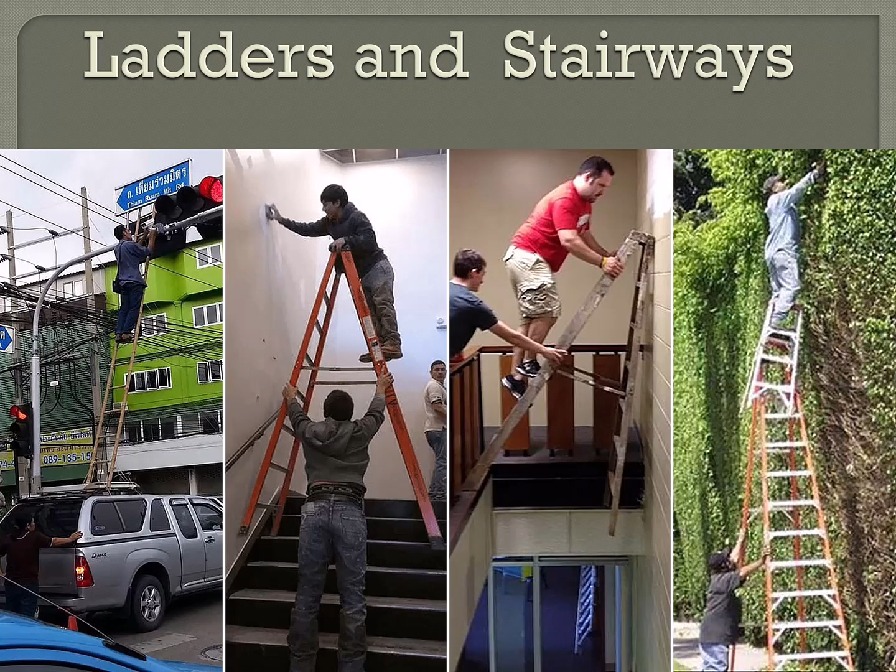Okay, today we're dealing with ladders and stairways, and hopefully none of them like this. One of the worst combinations is when you have to work over top of a stairway in some way, and then you start using a ladder. So a couple of these in the middle are dealing with that aspect. But none of these pictures are good. Okay, so don't do what these guys are doing.

So first of all, I stole this graphic, and it's not spelled right. Laddars should be ladders, but it does illustrate that we have different angles. A ramp has to be a much gentler slope, and then stairways are somewhere in the middle area. Actually, for OSHA, you can go up to a 50-degree slope with stairs when you're talking about the stair stringer, and I'll show you an example of that later. But for the building codes, you have to be somewhere in that area of 30 to 35-degree angle.

And then for actual ladders, they're supposed to be somewhere around 75 and a half degrees. But they can be vertical if they are what we call fixed ladders that are mounted to the side of the building, mounted to the side of a tank or something. And then there's these danger-prone areas in between where a stairway doesn't work very well, and a ladder certainly doesn't work very well either, for between 50 and 65 degrees for any setting.

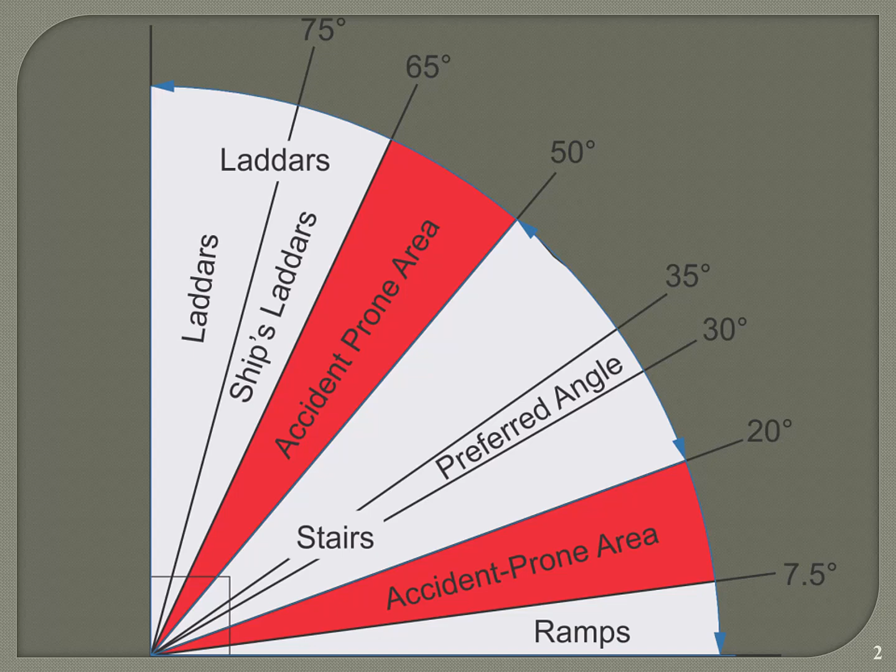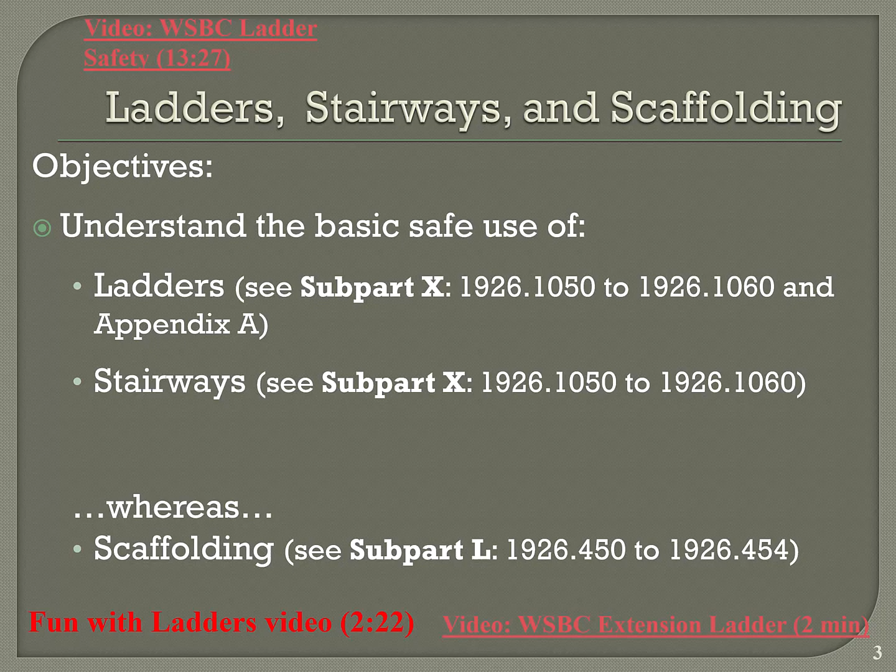So first of all, ladders, stairways, and scaffolding are all part of how we work at elevation. Here we're focusing on ladders and stairways. They fall under subpart X in the construction standard between 1926-1050 through 1926-1060, and they have an appendix A in there also. Meanwhile, within that same section is also stairways in that same area there. So they're subdivided and they're dealt with together. Whereas scaffolding, which will be our next topic, is in a different section of the construction standards, subpart L, 1926-450 through 454.

This all comes from the top four ways that we have fatalities in the construction business. Falls, working from elevation, and so that's the top one. And so dealing with ladders, stairways, and scaffolding kind of relates to that area. Meanwhile, of course, struck-bys and caught-in-betweens we've covered already, and they deal with 10% and 3 or 4% respectively. And then, of course, in between those two is electrocution, which we're going to get to soon.

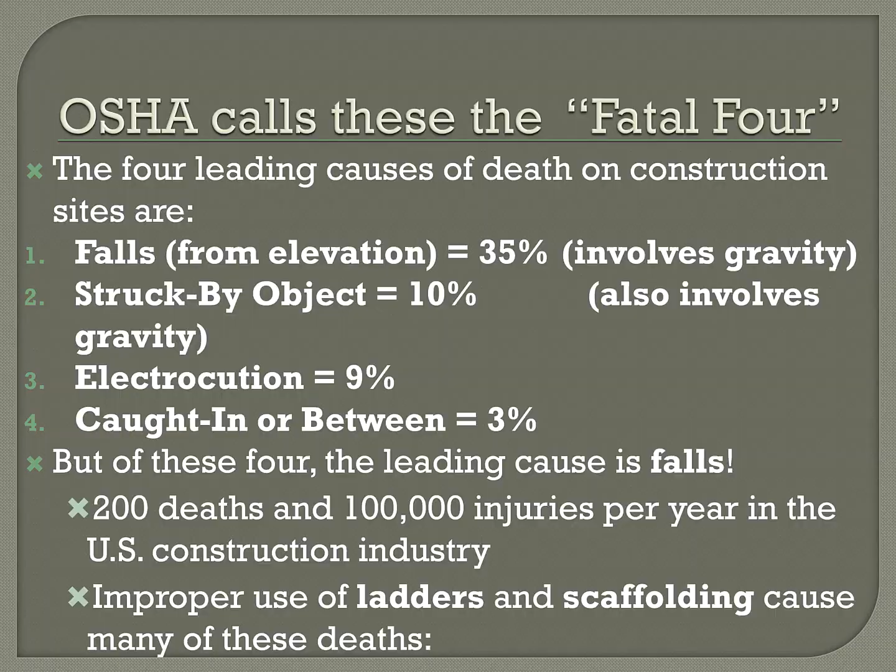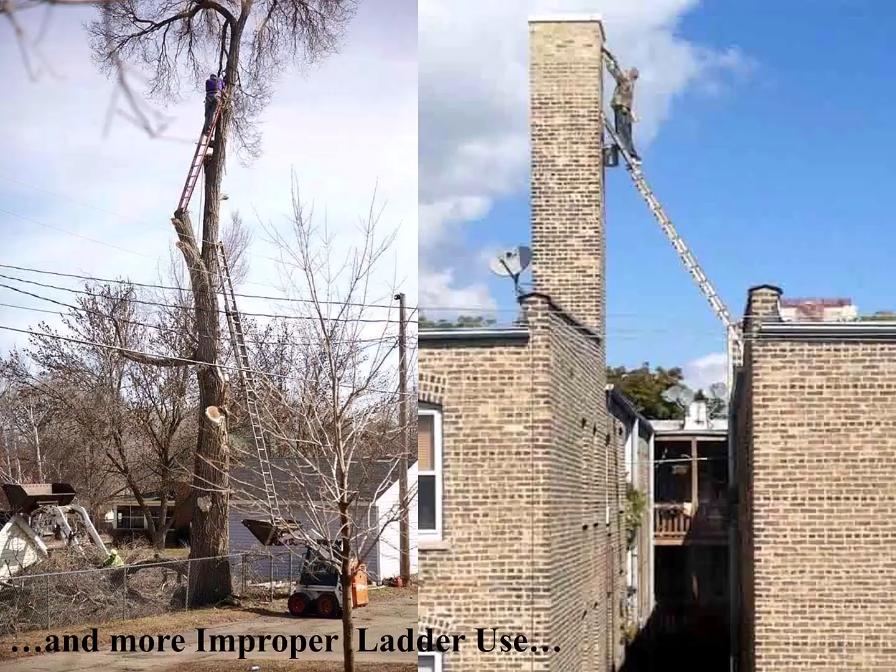He literally propped a ladder inside the bucket of a little loader, a front-end loader, a little toy loader. And then he cut a perch in the tree to sit another ladder to get up a little higher. So, you know, when you've got a can-do attitude, it's amazing what they will accomplish. But this is risking life and limb to try to cut a tree down. It's not worth it, and it's certainly something OSHA would freak out about.

Okay, and then we've got this fella here. He's standing on the 'do not stand' sticker on the second rung from the top of the ladder. When we consider the hinge point, that black part on the ladder, to be the top rung, you're never supposed to stand on the top two rungs of a step ladder.

The most common accidents associated with ladders, stairways, and even scaffolding are falls, being struck by falling objects, and electrocution, because if you're using aluminum ladders, they conduct electricity. Fiberglass is, of course, immensely safer for you.

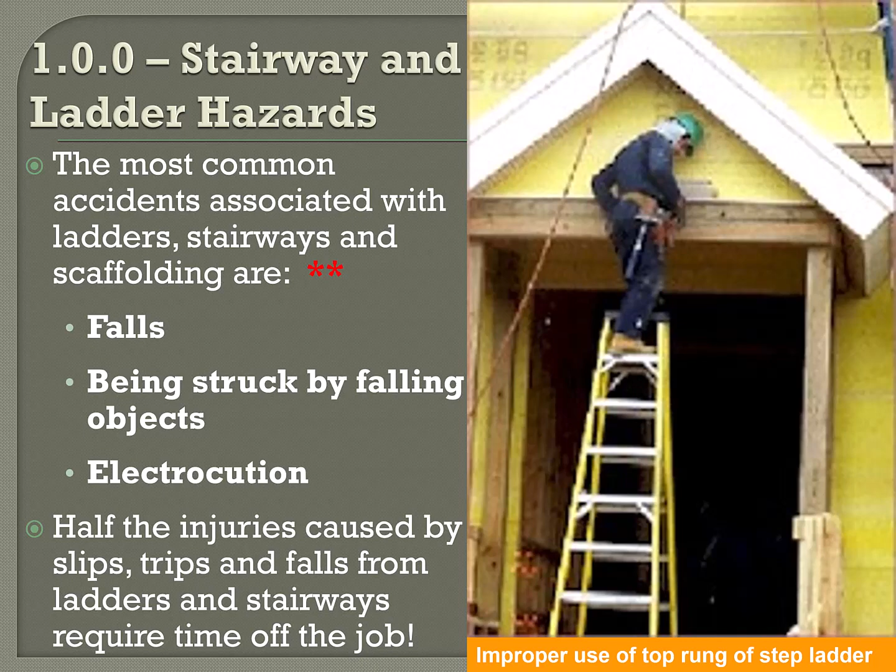A wooden ladder could be safe from electrocution if it's dry, but sometimes you can't tell that condition, because the surface of a ladder could be dry, but it could have been left out in the rain and gotten soaked, and still conduct well even though the surface seems dry. So it's hard sometimes to determine whether your ladder truly is dry enough to not conduct electricity, unless you know where it's been and its history. Heck, in Louisiana, wood in its natural state, not wet, just from the humidity, is going to have more moisture, and that means it's going to conduct more than that same wood in a very dry climate.

Okay, so what's wrong with this picture? Well, it's another aluminum ladder next to power lines. It's also maybe steeper than a 4-to-1 ratio, so it's a little steeper than it should be. And notice the guardrail on that set of stairs is pretty Mickey Mouse, so it doesn't really give you the room for this. Oh, and then you'd probably have to climb that guardrail just to get on the ladder too. It should be made of fiberglass or maybe wood. So it's an unsafe condition for several reasons.

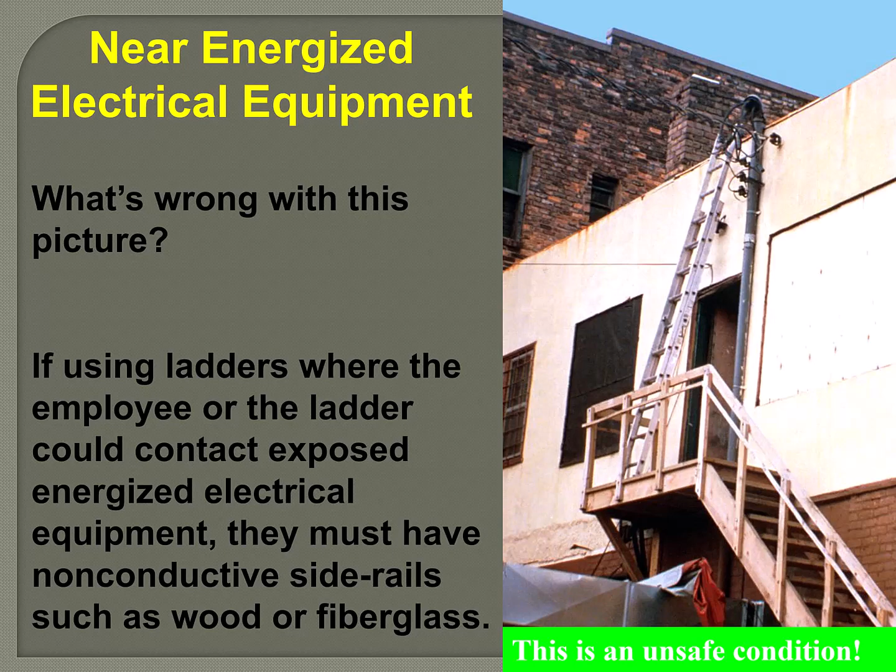And so that's the total run, or the run. Now we can talk about the unit rise and the unit run.

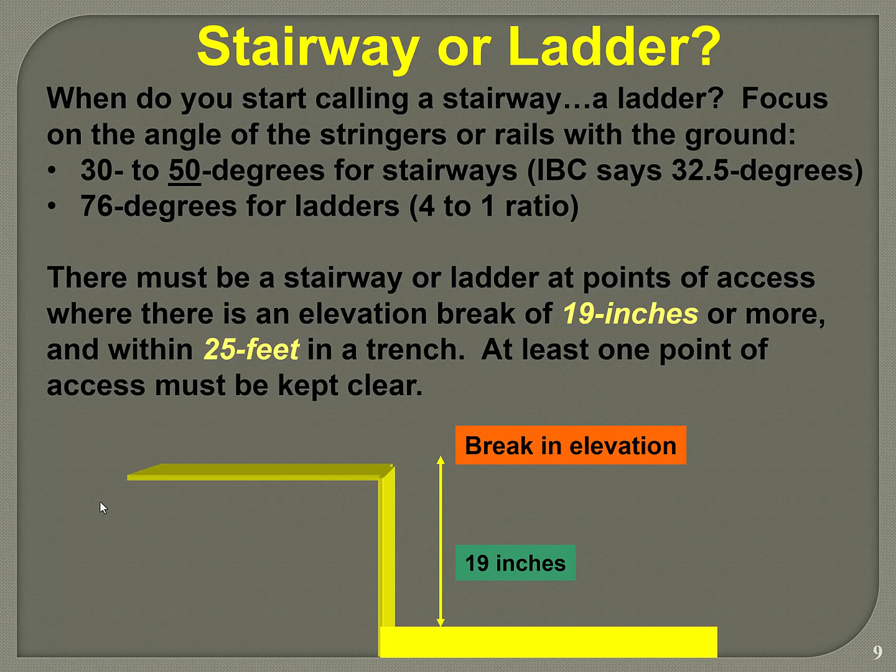And then if you're in a trench, you always have to have an egress, which is usually a ladder, within 25 feet of you. So that means you could have ladders every 50 feet in a trench, and you'd always be within 25 feet of a ladder. Okay, so that's enough things for this page.

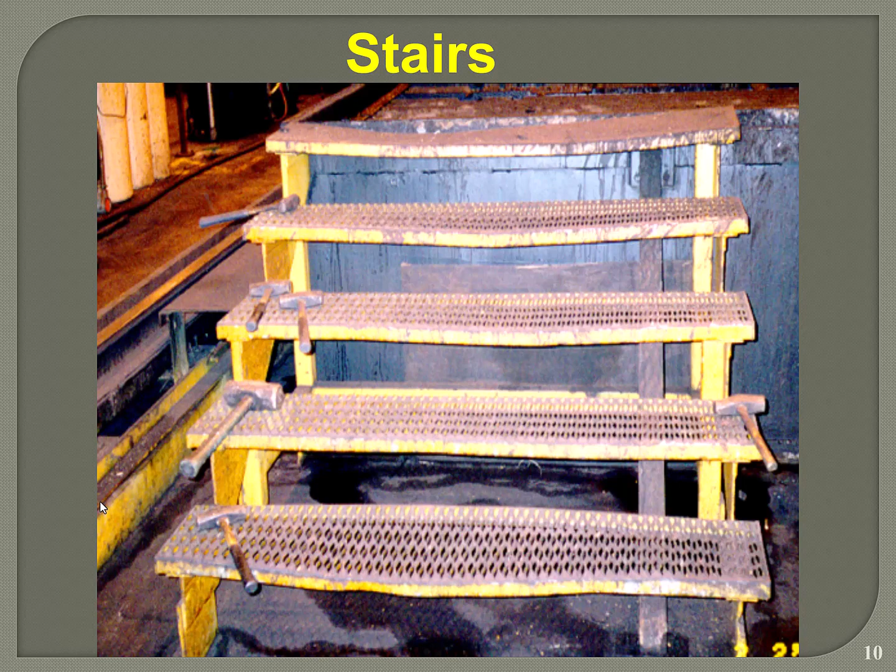Now, one other thing about this picture: as you decide you're having steeper stairs, in residential construction you can get away with, let's say, a 7 3/4 inch rise. As you increase the riser height, that will tend to make the tread boards slope downward forward. So as you increase one, you have to decrease the other. If we're going to have a riser height of 7 3/4 inches, that makes it a steeper stair, and to keep the stairs level on a stringer like this, you have to decrease the treadboard width. So if you had an 11 inch tread, you'd have to have a 10 1/4 inch tread board. There's another way of calculating it that could be slightly different, but when you're only making small adjustments like that, you can do one for one—as you increase one, you proportionally decrease the other.

So what does that do? That keeps the stairs level, and that's important because it's a little funky climbing stairs that are sloped forward or backward. But as you do that, now you've got less stair to stand on. So instead of having 11 inches to put your foot on, you only have 10 1/4. It goes the other way too—if you decide to have 4-inch risers, which is the minimum allowed by the building codes, you're going to have very wide tread boards.

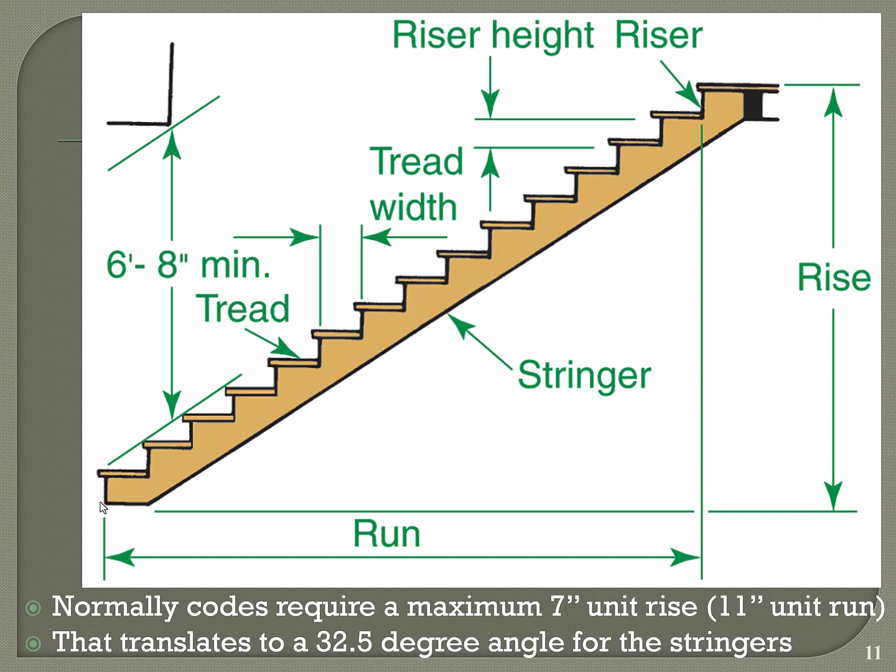I'm talking about some fundamental things that are pretty obvious once you start thinking about it. The other thing about stairs is you have to have something to hang on to. If you're climbing stairs where you've got a kind of guardrail type system, we call that a stair rail system. Whereas if it's mounted to the wall, we call it a handrail. I'm not going to be tricking you or worrying about that difference too much, but there is a difference and you should know that. Not everybody in the industry uses that terminology properly, so it doesn't mean you correct your boss when he or she mentions it incorrectly, but there is a difference in the definition here.

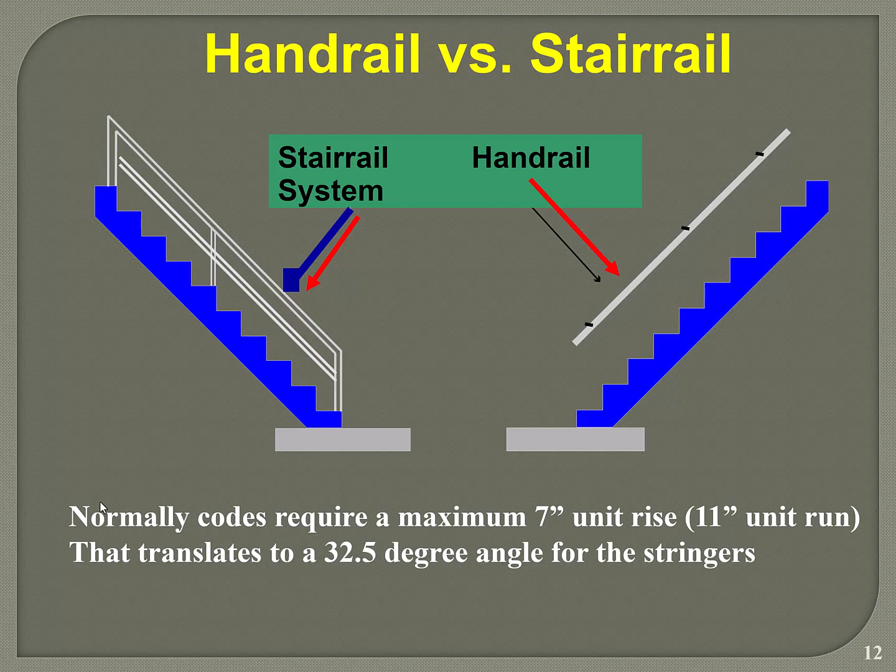They should be able to withstand the same force a guardrail system normally has to support: a horizontal force of 200 pounds pushing or pulling at the top rail, which should be the same on top of a stair rail or handrail system.

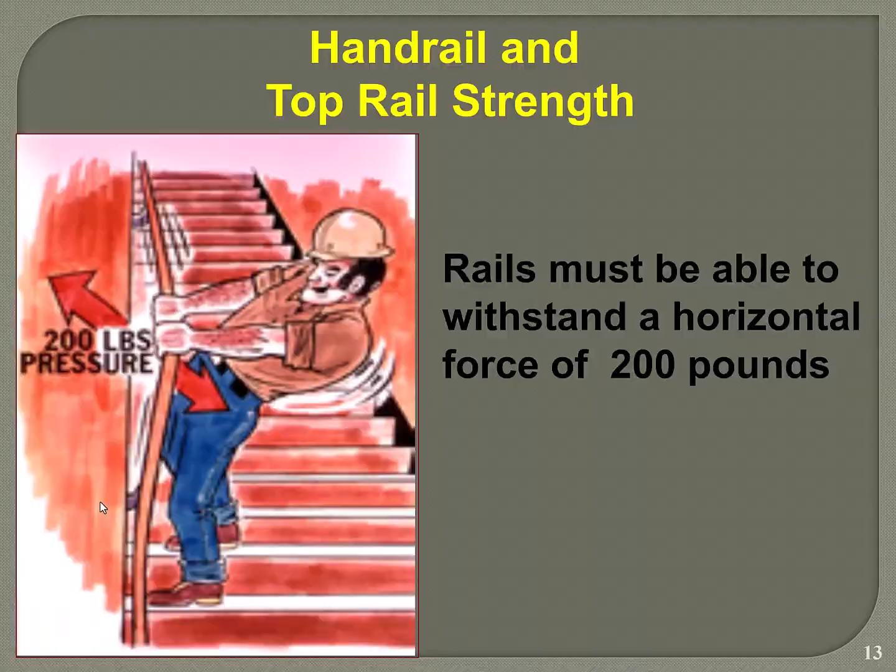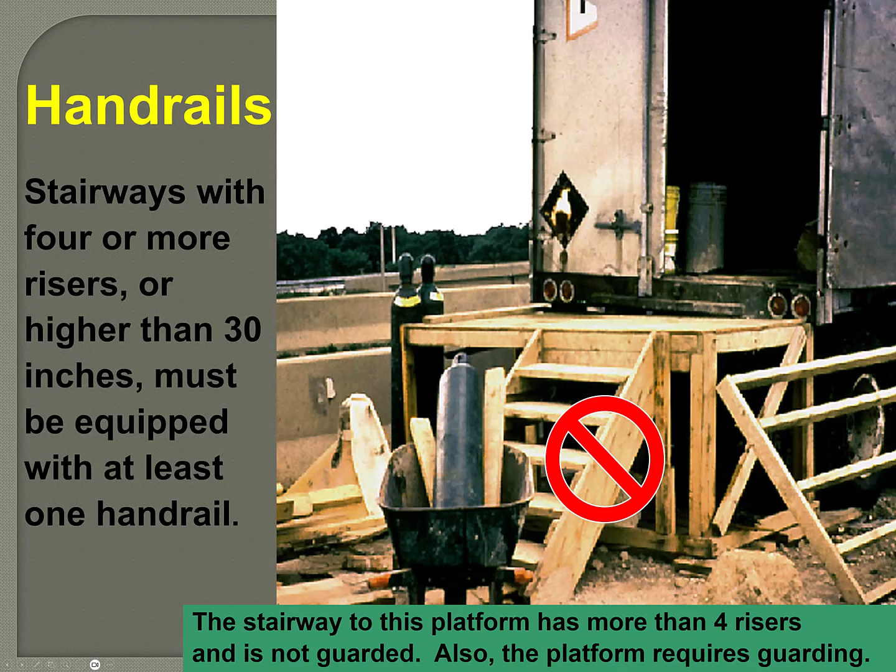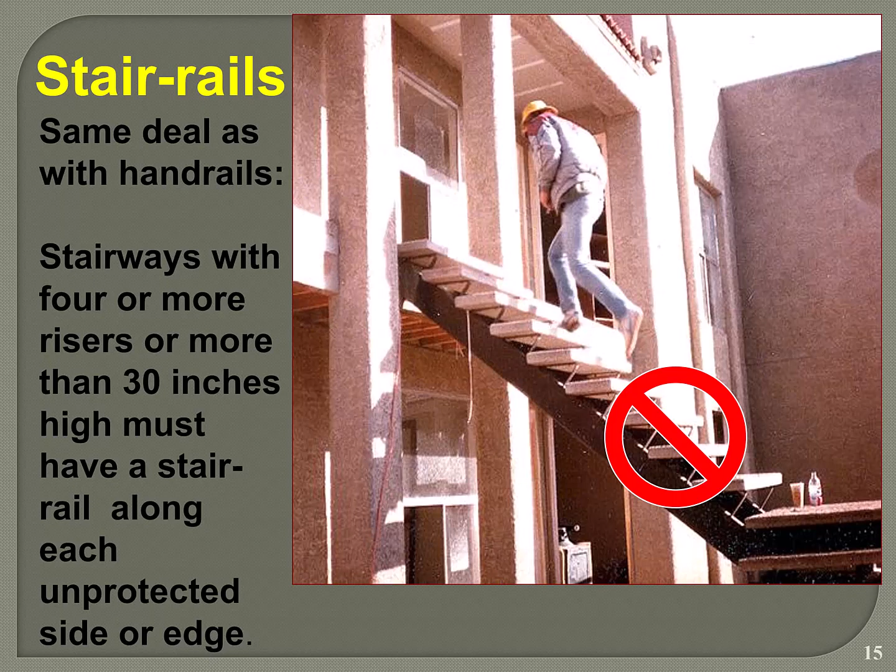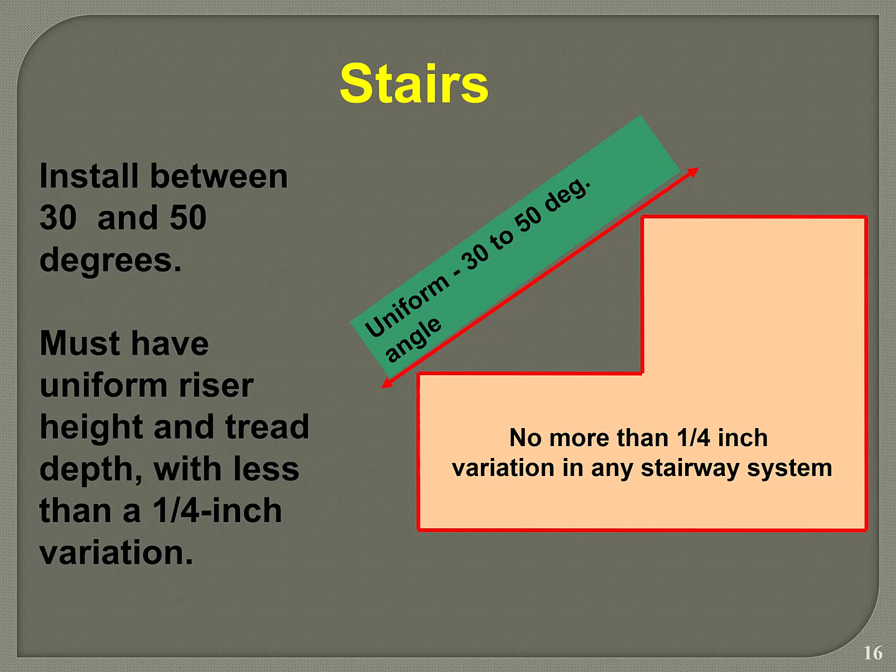Let's move on. Here we're looking at a wider set of stairs, and they're climbing higher. But just because the stairs are wider doesn't mean you're allowed to get away without having a railing, a handrail, or some kind of stair rail to hang on to. Stairs have to be uniform, like I said. OSHA allows you to go from 30 to 50 degree angles, whereas building codes only allow you to be somewhere around 30 to 32 degrees, maybe 35 degrees in residential. But it's not a good idea. If I was building my house right now, I would not ever go with anything steeper than 32 degrees.

No more than a quarter inch variation in any stairway system. That said, a quarter inch is not best practice. An eighth of an inch is more like it.

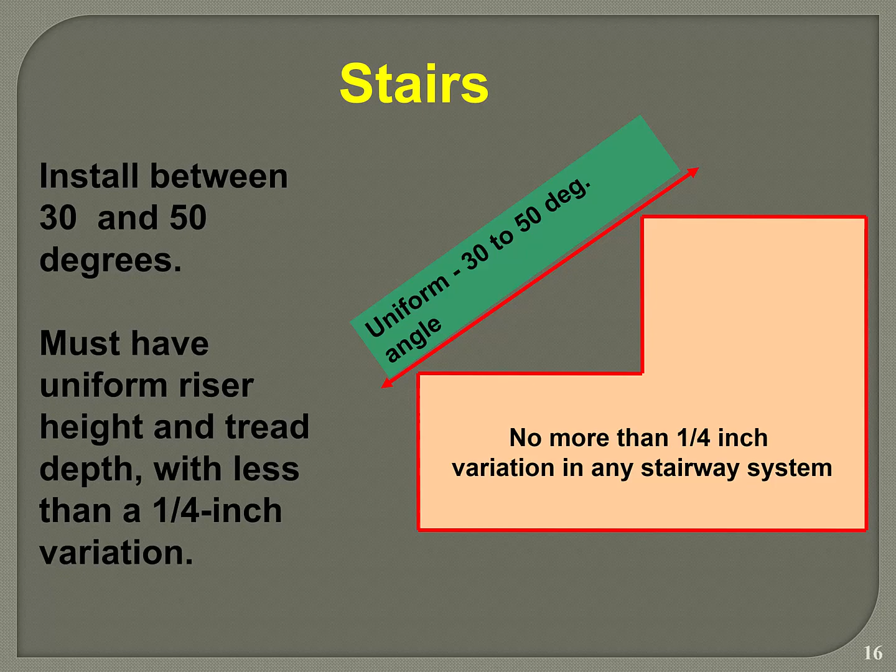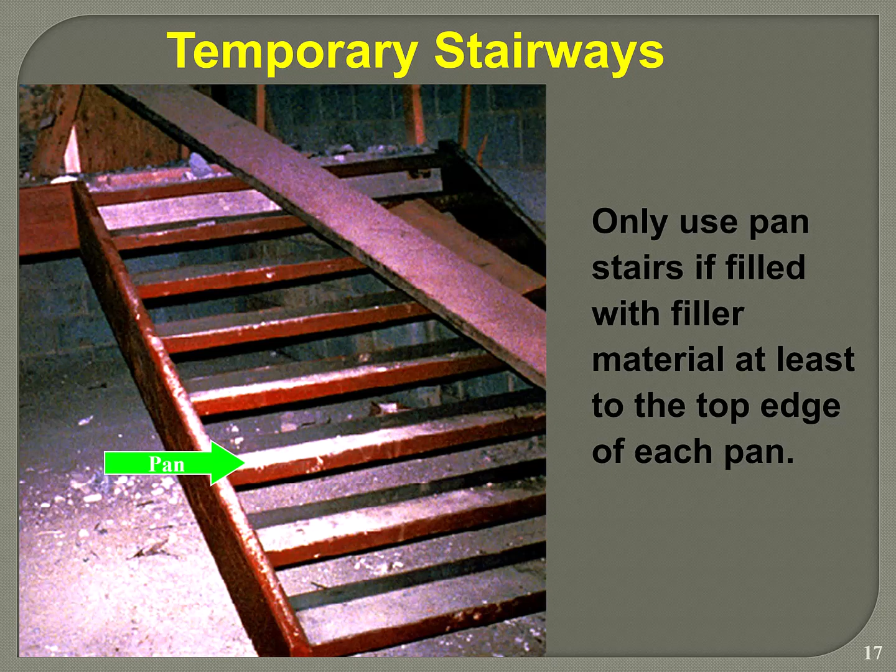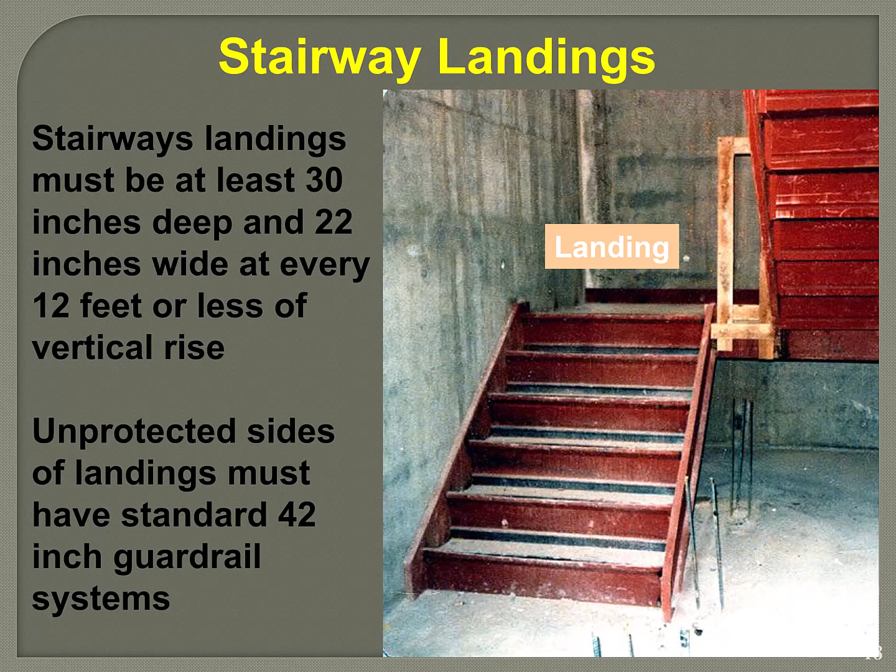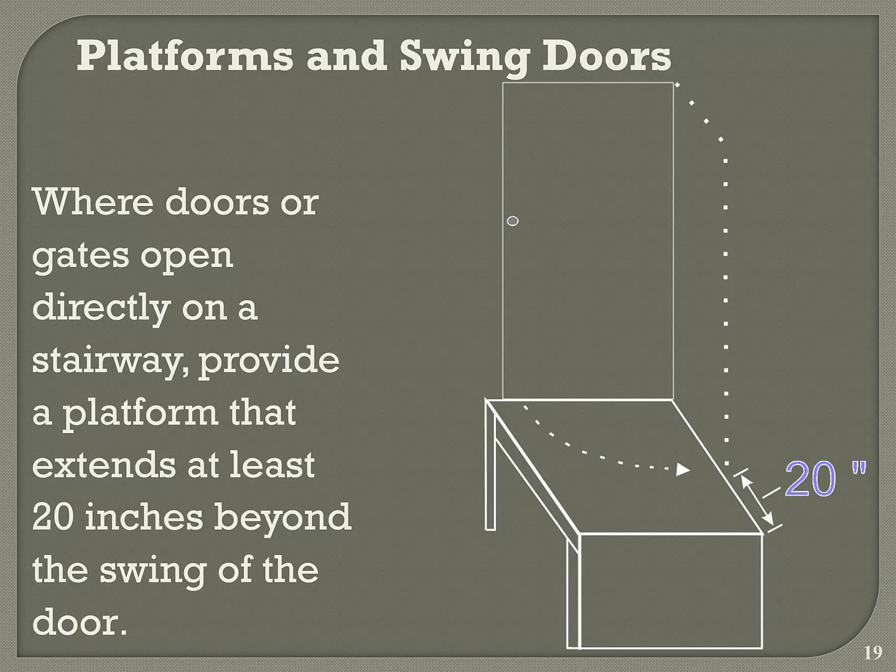Whereas in residential construction, there are plenty of cases where a door is allowed to swing the other way, only because there's only a few people living in a building like that. But it doesn't mean it's always a good idea. And you can't have anything slippery on the stairs either, because that causes slips, trips and falls and other injuries.

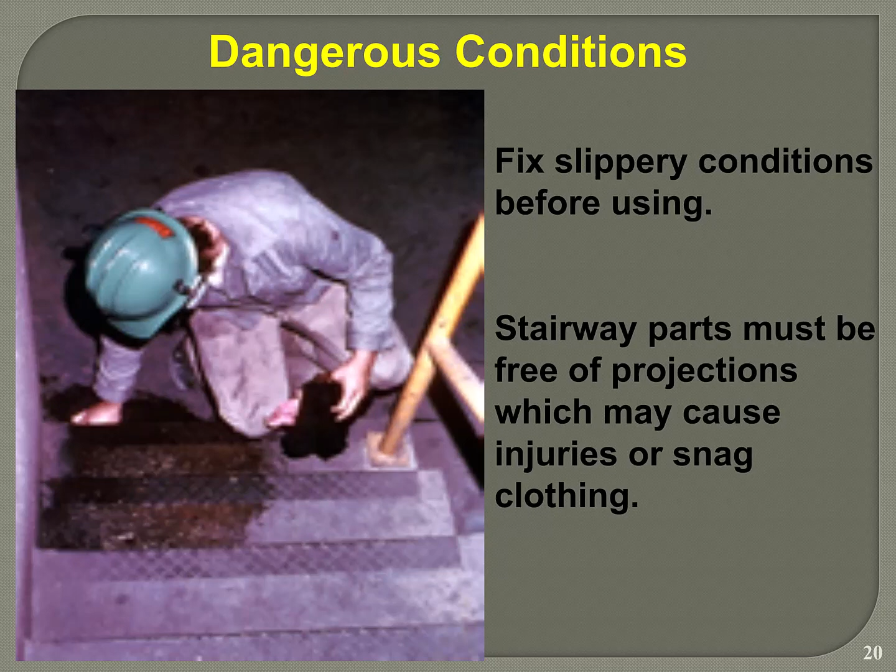Now, I've done so, and even had a case or two in my life where I'm halfway up that ladder, or maybe a little more, when it just slips out from underneath you, because step ladders do not generally have pivoting feet that give you traction. They are generally fixed legs or fixed shoes, or whatever you want to call them, on the bottom. If they have rubber traction, they're fixed, so they don't pivot to the contour you're going to.

So as soon as you get to a certain place, the bottom of that ladder will slip out on you very, very easily. So if you're going to break that rule, make sure you at least tie that ladder or brace it in a way where it cannot slip out.

But in general, step ladders, you're only supposed to enter and leave that ladder by way of the bottom. You're not supposed to use them to climb up to get on scaffolding or up onto the roof. If you've got to do that, you have to use a straight ladder or an extension ladder.

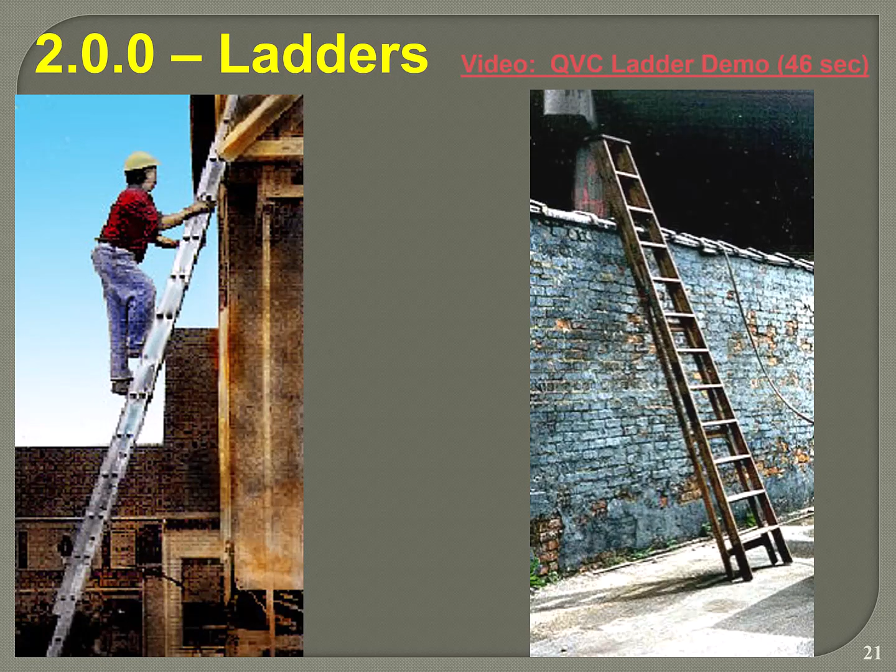Okay, so another thing about step ladders is you're never supposed to paint them, because you hide the flaws. You won't see the cracks—they'll be hidden away from you. You won't see the decay if they've been painted freshly, hiding that and such.

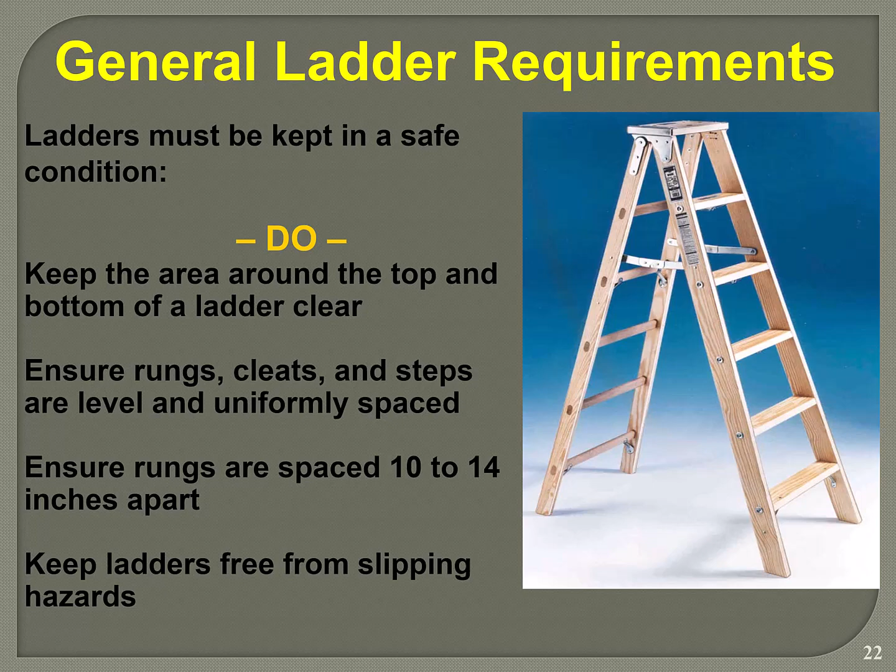You're not supposed to make homemade ladders or homemade scaffolding in general. OSHA does not disallow homemade scaffolding, but it should be designed and constructed under the supervision of a structural engineer who has signed off on it. That might not be practical, but there are cases where it comes up.

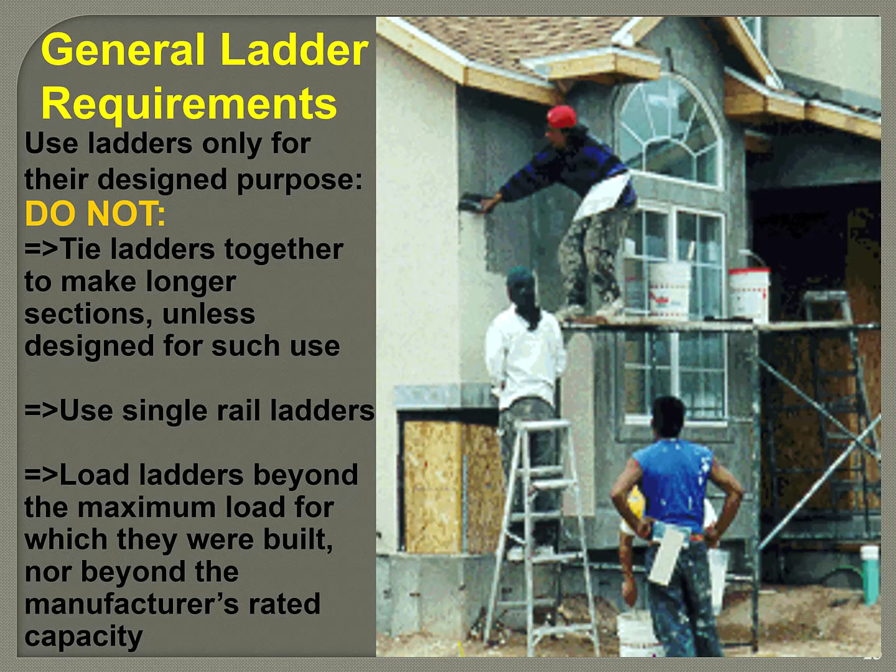Okay, here's some more fun with ladders. Another ladder in a bucket, or this ladder that was braced up—I may have shown you these pictures before too.

Normally with a roof, best practice is you have a metal drip edge or some kind of drip edge, and then the roofing underlayment will stick out beyond that a little bit, and the roofing material will stick out beyond the underlayment. So when you lean a ladder against it, you can damage those edges if you don't have something to protect it with.

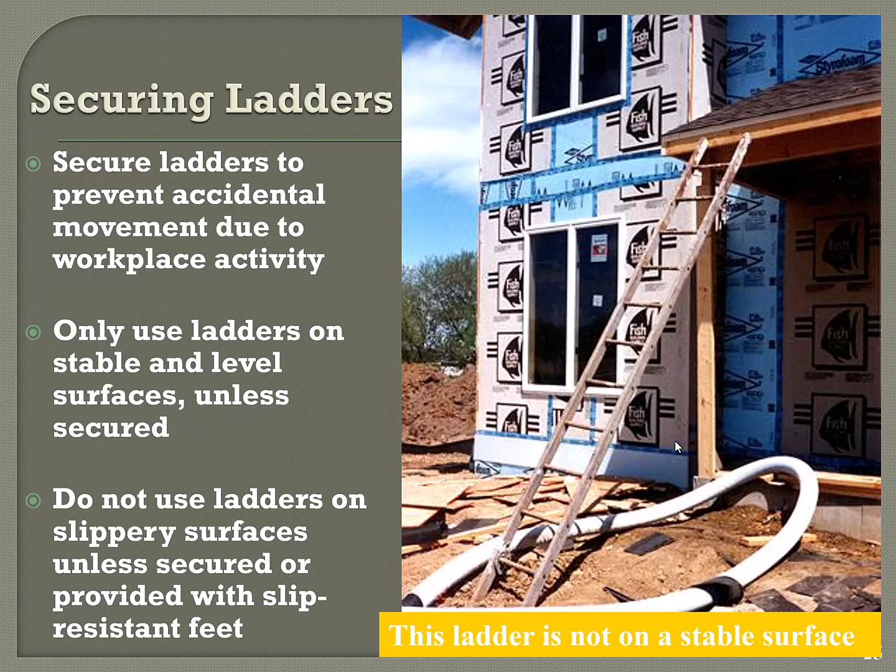But then there's tripping hazards around this thing too. So it's not a stable surface, and it's not at the right slope. Here we're at the right slope.

Ladders in general, and a lot of other things, including stairs and scaffolding, we design them to be 4 times stronger than they need to be. That's something you're supposed to kind of keep in your back pocket as a piece of information, but know that you're never supposed to extend or go beyond the rated capacity. So if a ladder is rated for 300 pounds, it means it can take 1,200 pounds at least before it'll fail. But you're never supposed to exceed the 300 pounds.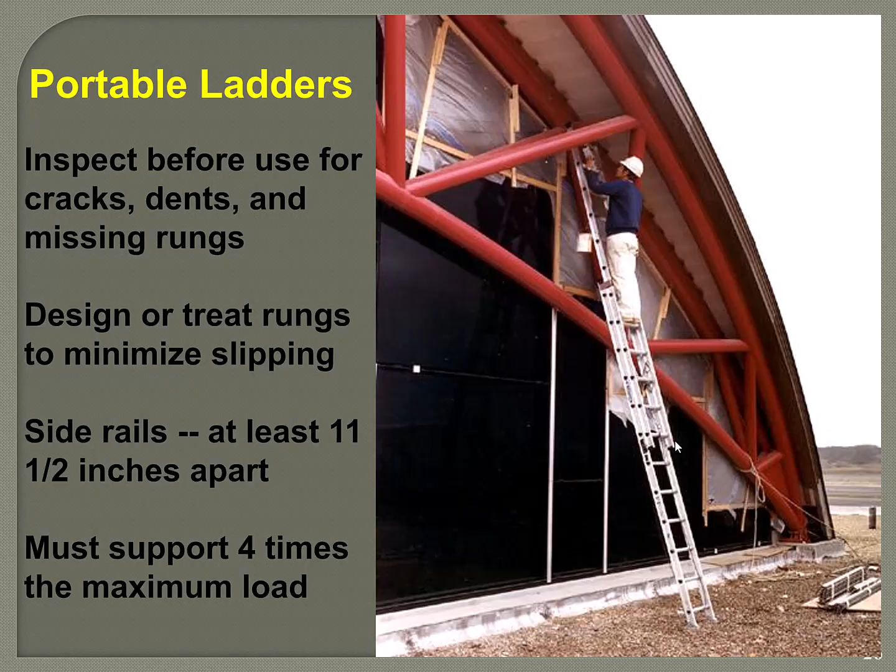So we have this classification of ladders by rated capacity. The original system was Type 1, heavy duty, 250-pound capacity. Type 2 was 225, and Type 3 was only 200. So from Type 1 to 3, you're going to lighter and lighter duty.

Meanwhile, the trouble with that system was when they decided they needed a stronger system for heavier duty ladders, Type 1A became 300 pounds, and then Type 1AA, 375, for double extra duty, extra heavy duty. So remember the Roman numeral system is Type 1, 2, and 3, where 1 is the heavier duty ladder and 3 is the worst, or the least heavy duty, the light duty.

So that's what I say. On a construction site, you probably shouldn't use anything less than a Type 2, and really the vast majority of sites use Type 1 ladders or heavier. Because when you think about it, the average person you know is going to be needing Type 1. And if you've got a carpenter's belt on with tools in it, that adds to your weight, and you got to talk about that weight as part of this weight too. I've had times when I've had 50 pounds of stuff in my carpenter's belt. It's a little heavy, especially in the Louisiana sun, to be doing that. But in the winter in Canada, it was kind of good to have a little extra weight on you. It kind of helped you work a little harder and stay warm. Okay, well, I digress. But just be aware of this system.

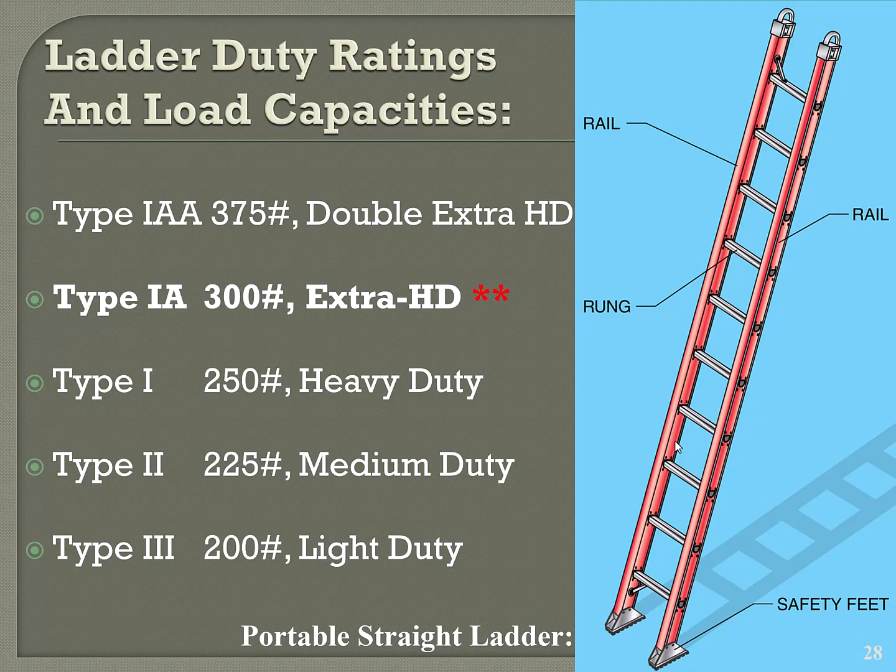Now what you're looking at is a straight ladder, not an extension ladder. There's no rung locks for hooking up to another piece, but one half of an extension ladder will look basically like this. Okay, and so you see the rungs that you stand on. Those are the steps, we call them rungs. And the side pieces that hold onto the rungs are called rails. And then you got the safety feet that pivot.

The safety feet on the bottom pivot. They pivot back so that the pointy parts are at the front, and when you pivot it back you can stick them in the ground so they dig into the dirt or grass for good traction. But if you're on a finished concrete floor or some other type of floor, you pivot it the other way so you get the rubber feet contoured to the ground for maximum traction. That said, you should never rely on the safety feet.

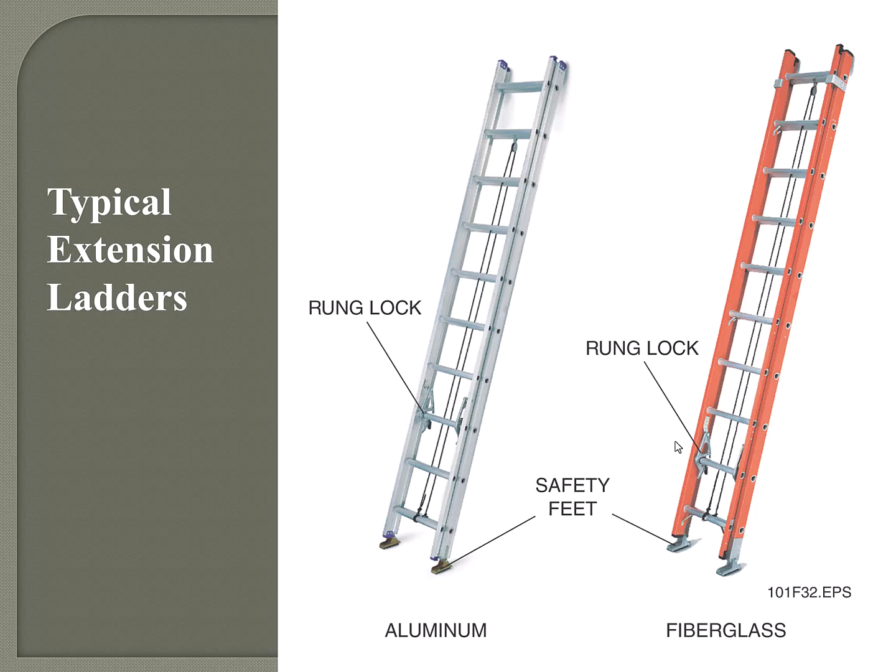They're better than nothing, but you really should either tie the ladder or block it up. You could take a board and some stakes and drive them into the ground right in front of the ladder to keep it from slipping out. Or you could tie the ladder at the top or somewhere else to keep it in place and keep it from slipping out. That's what you do to make a ladder safe.

So I have a 40-foot ladder at home. That's a big heavy-duty ladder, and it's pretty heavy. At 40 feet long, the minimum overlap on that thing is 4 feet. So that also means my 40-foot ladder, when fully extended, isn't 40 feet - it's 36 feet long. And I've never had a 60-foot ladder, but apparently you need a 5-foot overlap on that.

But the testable point to remember here is the first one, the 3-foot overlap. And the reason I care about that is the vast majority of your ladders are going to have that 3-foot overlap.

These ladders come in increments, like a 16-foot ladder, and then you typically add another 4 feet to them. So the next length of extension ladder you can buy on the market, typically from Werner and other companies, is 20 feet long. So you go from 16 foot to 20 foot to 24 foot to 28 foot to 32 feet, and then the next length is usually 40 feet. But all of those extension ladders, except for the 40-foot ladder, need a 3-foot overlap. So that's the one I want you to know.

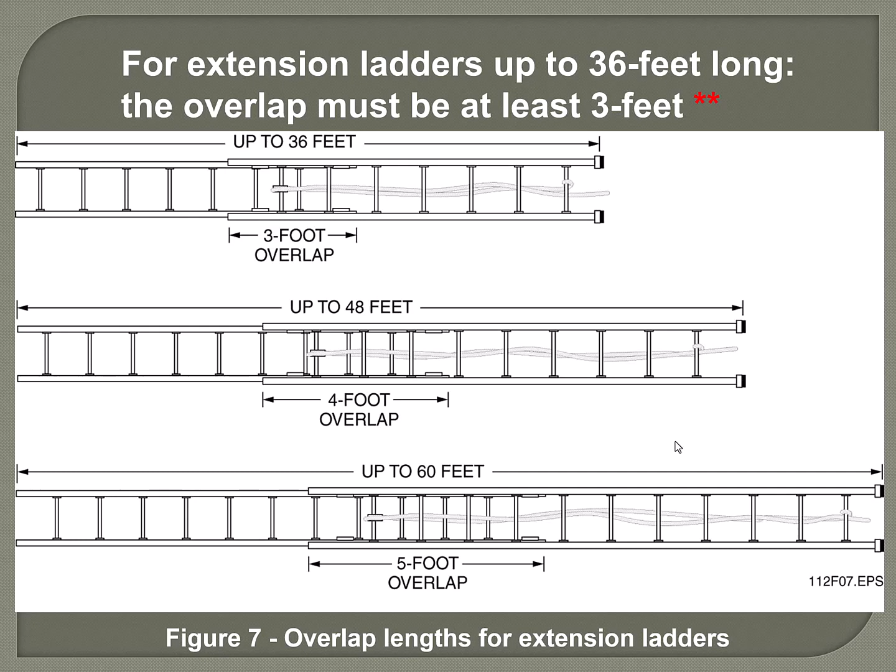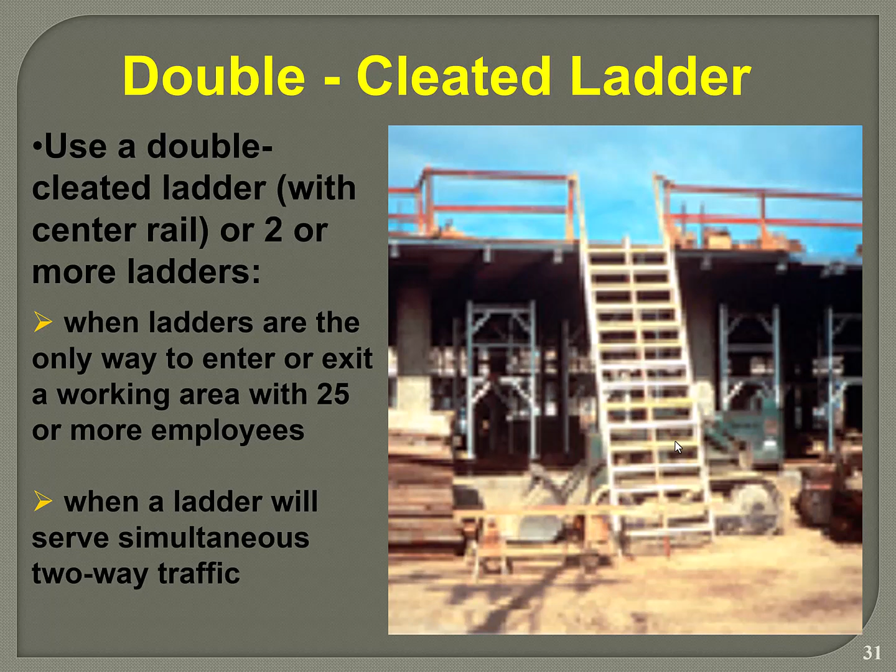With that 4-to-1 ratio, you know that for every 4 feet you're going up, you have to pull the ladder back another foot. So if we're going up 4 times 4 to get to 16 feet, that means you're pulling the ladder back 4 feet instead of just 1 foot.

Well, if it was 20 feet up, you'd have to pull it back 5 feet. So for this ladder, let's say it's 20 feet long, and when we lean it up against the building, if you know it's 16 feet, you can just pull the ladder back your 4 foot and you'll be there. The thing about this is it's making a right triangle where the ladder is the hypotenuse, the long side of a right triangle.

So the reality is the length of ladder you need to touch the top is going to be a little bit more than 16 feet, and you need 3 feet sticking up. So if this is a straight ladder and it's 20 feet long, yes, you're going to lose something. So let's subtract off a foot for that.

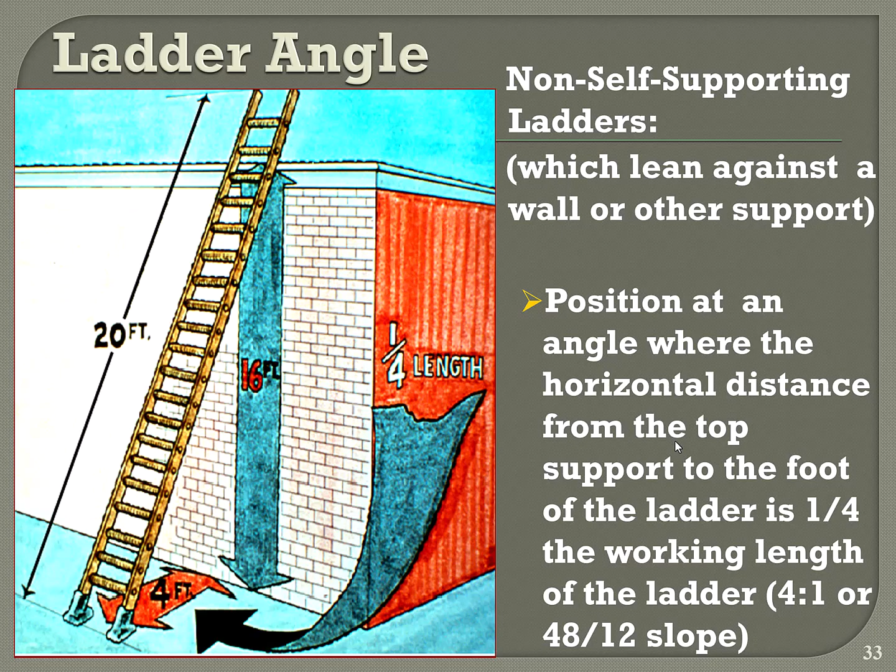That's the problem with most of the ladders you're going to deal with for this kind of thing, for climbing up onto a roof, climbing up onto a platform, scaffolding, anything. An extension ladder needs to be 7 feet longer than the height you're trying to climb to.

Let me show you here. On this 20-foot extension ladder, you see in this picture you got to have 3 feet sticking up. You actually can't step any higher than the 4th rung from the top. In this picture, the 4th rung from the top is just below the top of that deck, so you lose at least a half a foot in there, maybe more. In this case, it's more than a half a foot—actually it's 0.6 of a foot.

So I say you just subtract a foot in every case. That'll work all the way up to a 32-foot extension ladder anyways, and more. And then you need 3 feet for the overlap, and you need another 3 feet to hang onto. So that's 7 feet right there, basically.

So a 20-foot extension ladder can really only get you up 13 feet in the air. Subtract 7 feet from it, and about 13 feet is about all you can trust to get for height on an extension ladder. A 24-foot, subtract 7 from there, and you get 17 feet out of that. A 32-foot extension ladder can only get you up, I think 32 minus 7, up to 25 feet of elevation. So the 7-foot rule is a really good, useful thing for you to use to make sure you show up with the ladder that's the right length.

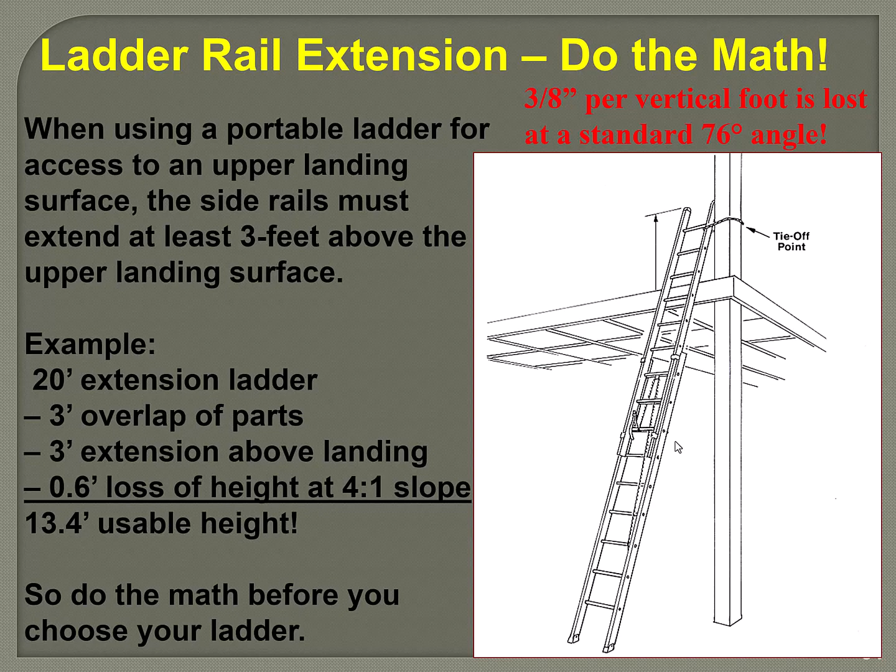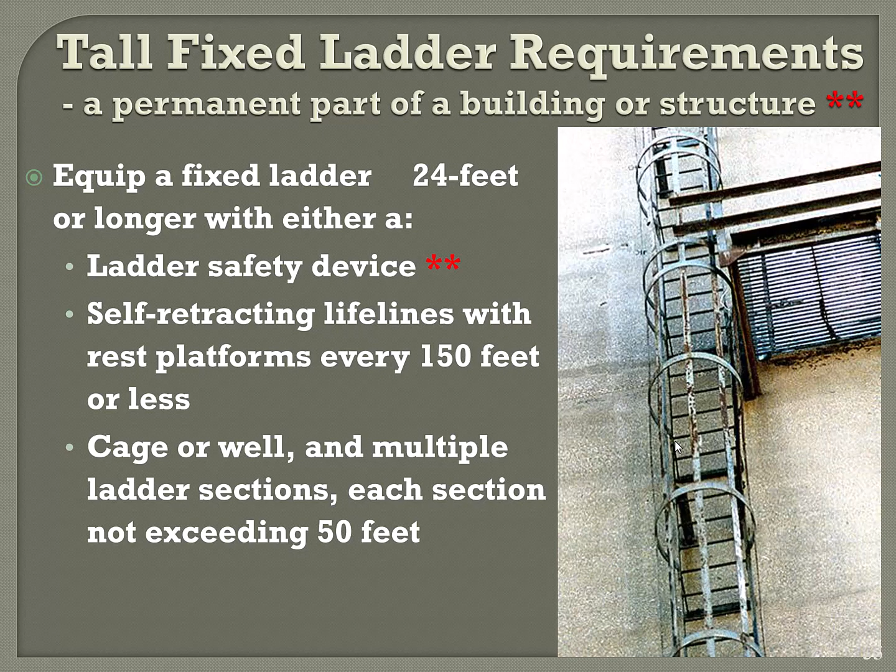So that's what I've got on this page. If it's 24 feet or longer, you must have a ladder safety device on it. So what is that? This cage is one type of ladder safety device. Another could be a self-retracting lifeline, or a vertical rail that locks, a vertical lifeline system of some sort, which the self-retracting lifeline could be. But you need to be 100% tied off. The cage is really an old-fashioned thing, and it isn't really an acceptable ladder safety device anymore. But it's mentioned here because it's still on the books. In best practice in the industry, you don't rely on these cages. Within a second or two of falling, you'll be going too fast to grab hold of anything on that cage.

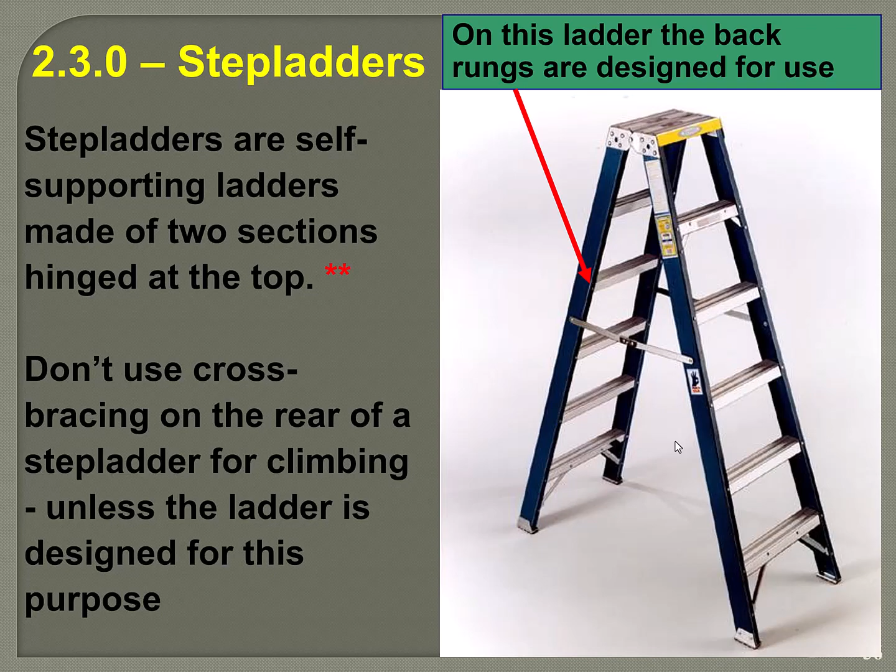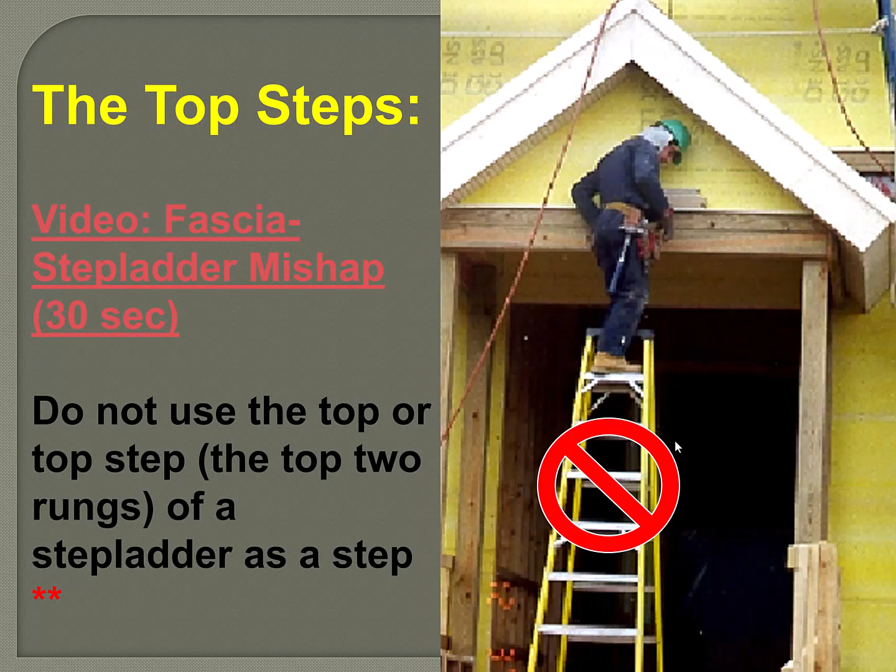On the way up, you might be aware enough to see that rung is missing - you'll feel it maybe with your hands if you step beyond it. But on the way down, I guarantee you will forget. You won't be able to see it. And if you miss one rung on the way down, you're going down - with or without the ladder along the way, but it won't be pretty. So you need to take it out of service, do not use, or better yet, cut it into pieces so that nobody can use it.

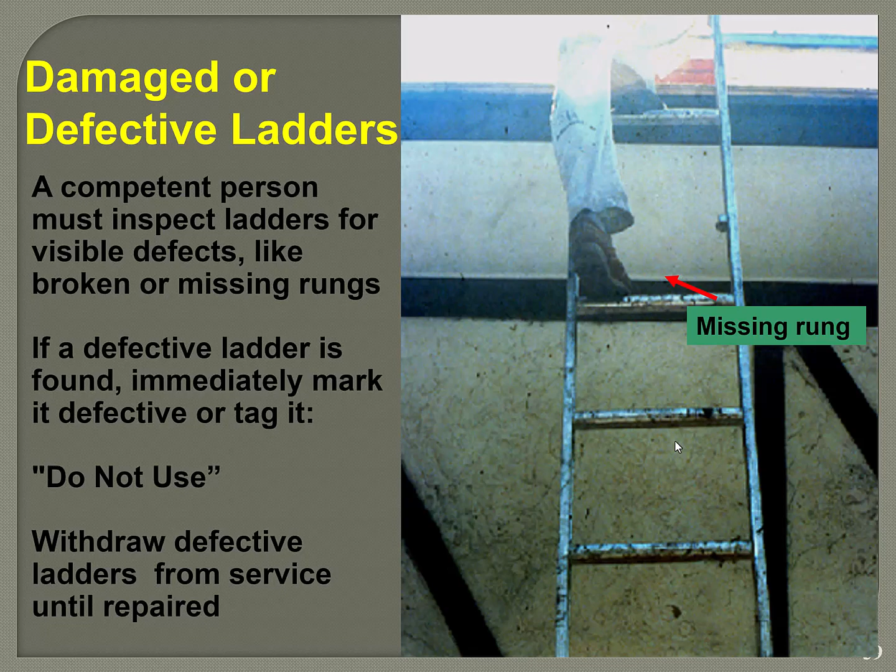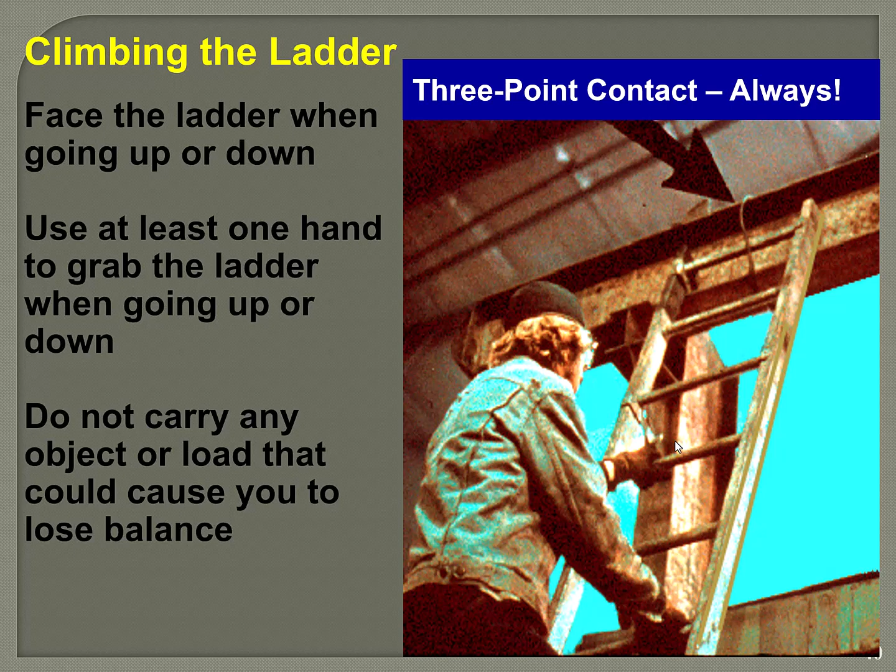Climbing a ladder, you need to have 3-point contact. Again, that means at least 1 hand to grab the ladder and 2 feet, or 2 hands and 1 foot. You've got to keep hanging on, all hands on deck. That means you can't carry anything in your hands at all, because otherwise you can't do the 3-point contact technique.

So here's some ladder review. Ladder setback has to be 1 foot for every 4 feet of length - that's the 4-to-1 ratio here. So if it's a 16-foot ladder, that means pulling it back 4 feet. And then you can see the next bullet on the top of that picture: the ladder should extend 3 feet above the upper support point, whether that's a roof, another floor on the building, or the scaffolding you're climbing up to.

The last bullet point here is actually two things. It says do not stand above the fourth rung from the top of an extension ladder or straight ladder. The fourth rung in this picture is 1, 2, 3 that you can see, and the one you can't see is just below the deck at the top, and that's the last one you can stand on. If you stand on the third rung, you don't have three points of contact on that ladder, and you're creating a teeter-totter effect where you could possibly lift the bottom of the ladder off the ground.

The second part of that last bullet says you do not stand above the second step from the top of the step ladder. So the top two rungs of the step ladder or steps are off limits for standing on.

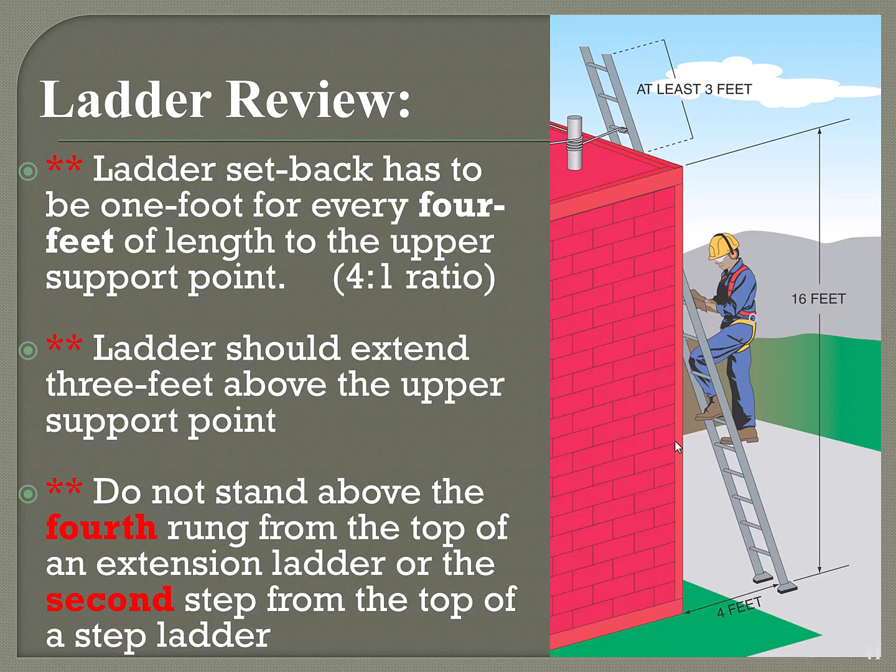So in summary, there's a potential electrocution hazard when using ladders and scaffolding. Ladders, especially when made of aluminum or other metal, can have rungs on a fixed ladder that are made of metal too. And most scaffolding is made of metal.

Ladder setback has to be one foot for every four feet of length to the upper support point. That's the 4-to-1 ratio I keep talking about - a 4 foot rise to a 1 foot run. The vertical number is the 4, and that's the way rise-run relationships are normally listed, which is why I listed this ratio that way.

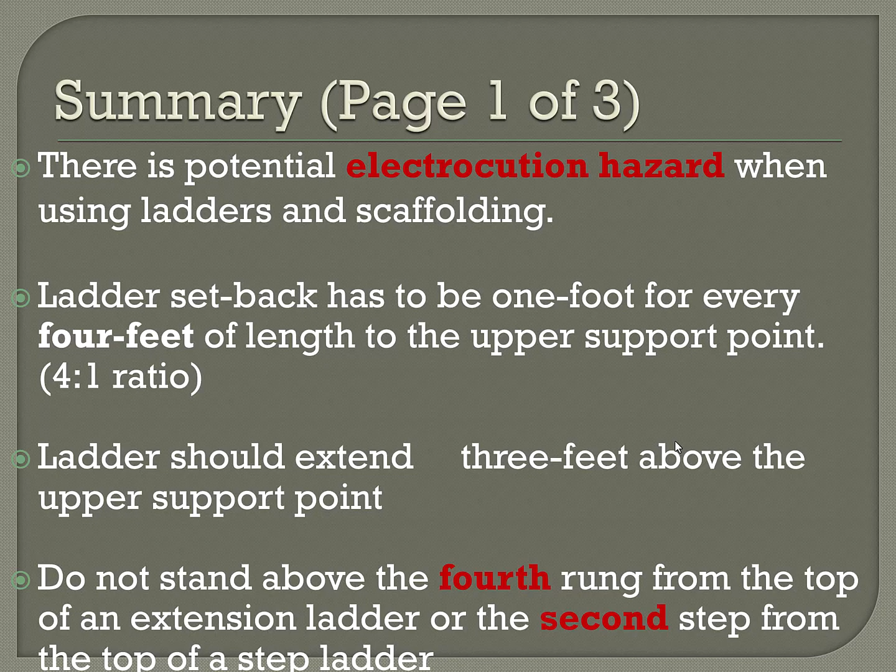The next bullet: a ladder should extend 3 feet above the upper support point. I just said this on the earlier page - do not stand above the 4th rung from the top of an extension ladder or the 2nd step from the top of a step ladder.

Next page: the overlap for a 32-foot extension ladder should be how much? At least 3 feet. You can see a question like that on a test near you - hint, hint. Next bullet: step ladders are self-supporting ladders made of two sections hinged at the top.

Third bullet here: fixed ladders are a permanent part of a structure and cannot be easily removed. I had that in the presentation but didn't mention it here, so it's important. I'm trying to catch things I might have missed, so watch how that could be turned into a test question.

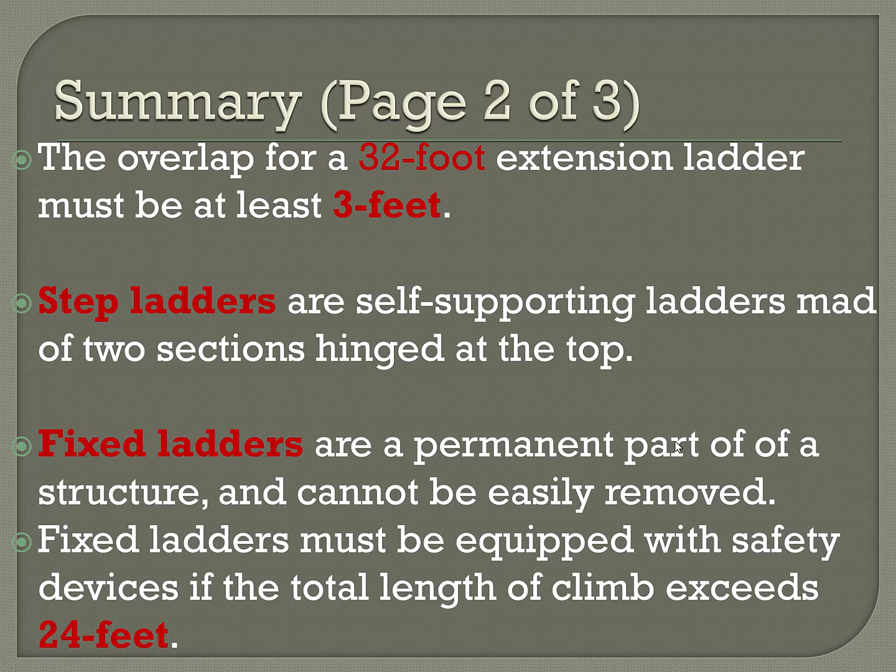The last bullet on this page: fixed ladders must be equipped with a safety device if the total length of climb exceeds 24 feet. These are numbers - you either know the number or you don't, so watch for any possible test questions with numbers like this. Remember the 24 feet related to fixed ladders. The fixed ladders are the vertical ladders mounted to a tank or the side of a building in some way.

On the last page I just have a few things. It says the top rail of scaffolding should be at least 42 inches high. This comes back to remind you about stair rails too, although the stair rail number is measured from the bottom where your toes touch at the back - if you measure up from there, it's only about 36 inches when measuring from the tip. So those numbers will change on steps depending where you're measuring from.

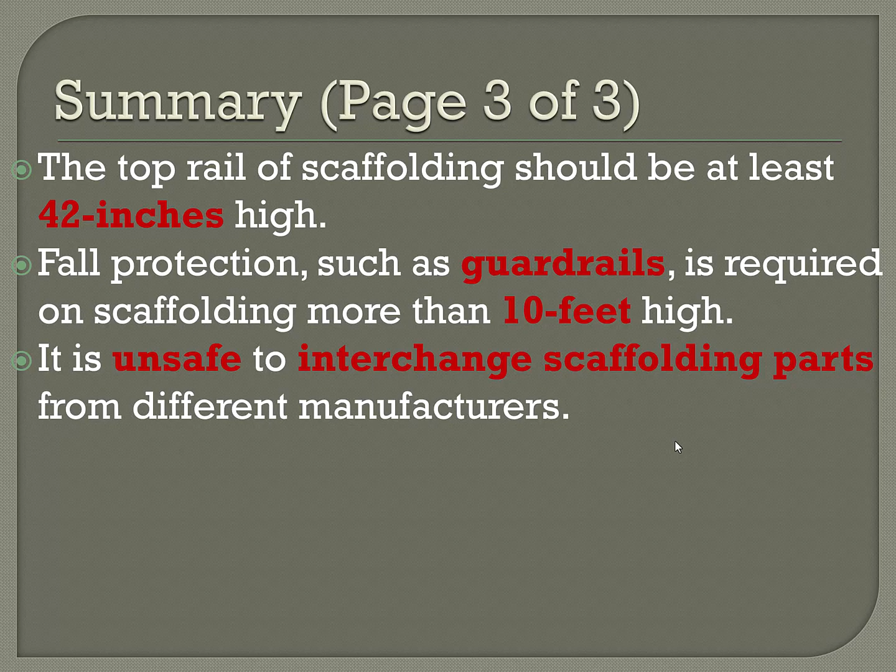The second bullet: fall protection such as guardrails are required on scaffolding more than 10 feet high. That really comes into the next section. Also related to scaffolding, it's unsafe to interchange scaffolding parts from different manufacturers. Both of those points, and really all the things on this page, should be in the next section dealing with scaffolding, but you're just getting a precursor of it. Stick a fork in it and call this section done.